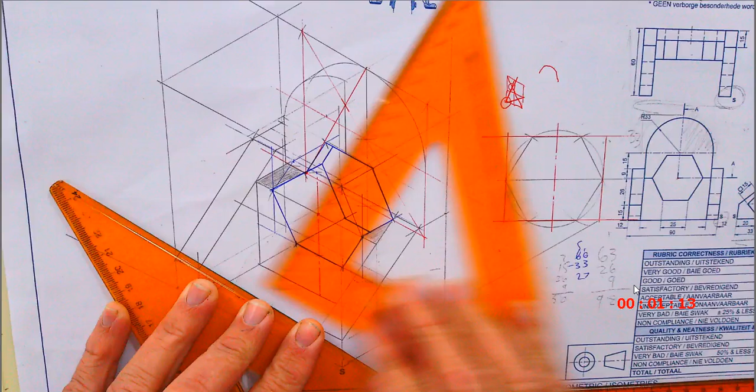My hexagon. So what happened is the hexagon is lying here in the front, right? And if you are drawing it out, we need to use these distances to project to.

So what I was doing is I drew it. You'll see here that distance is that distance, that width is that width. So you first draw it in the whole thing in the front.

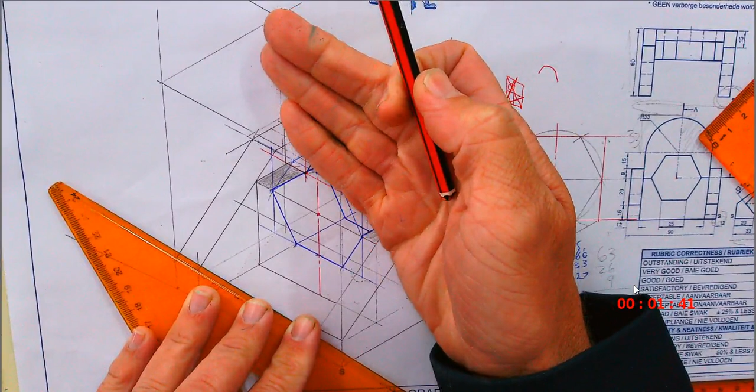Why is your top like pointy, so it's not flat? Why is mine like that?

So what has happened here is I haven't, this thing hasn't been completed yet, the side, so it might throw out your eyes slightly.

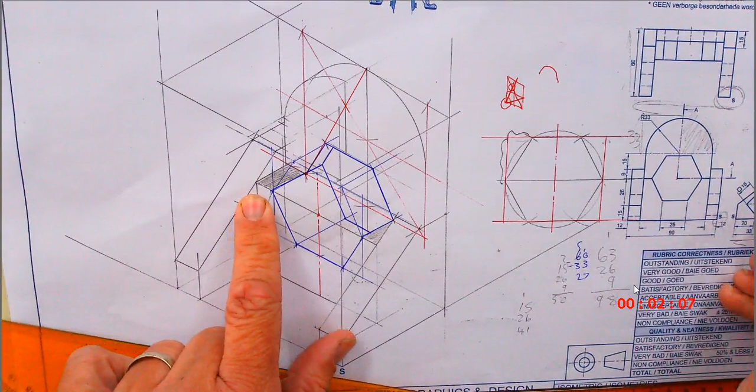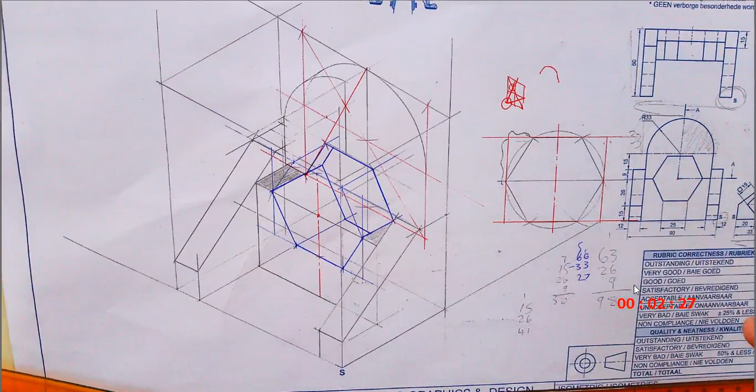Okay, so we're going to check that out now. What I did, the other part, it's an important part, and I didn't actually do it in this drawing. Normally I always say before you do anything else, sketch out the drawing. I cannot see that I did it on this specific page. I think I did it somewhere else, maybe, I cannot remember. I think I had a rough sketch somewhere. Bottom line is, if you've got a 3D sketch, you're going to save yourself a lot of drawing time.

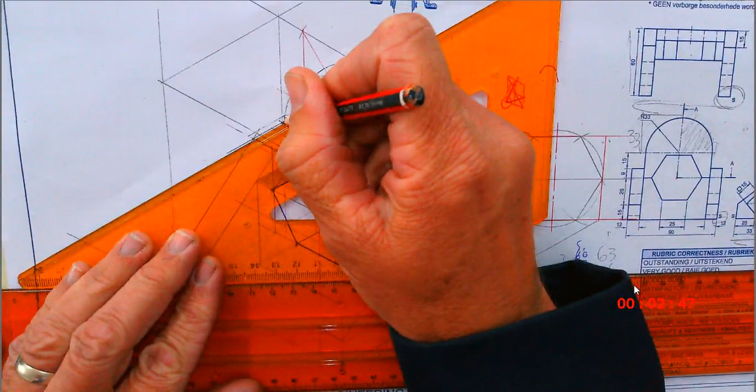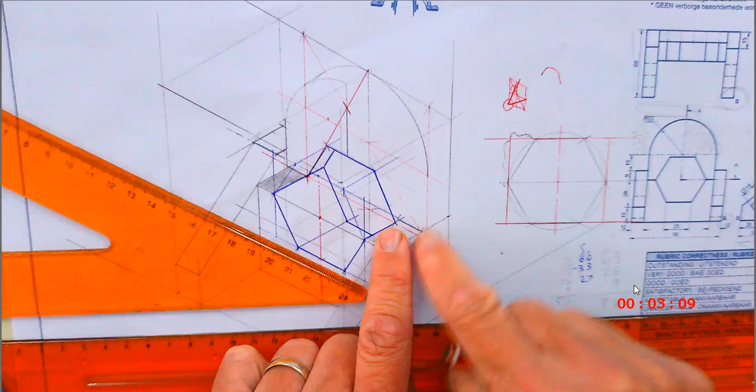You have to make sure that you are working on the correct level, because you can easily make a mistake and think that you are drawing on a surface when it's really a little bit further to the back.

Okay, I'm going to look at this part here. This is where my box and my drawing would end. I'm going to project that over. Some of this are going to fall away in a moment, but I'm first going to draw the whole thing.

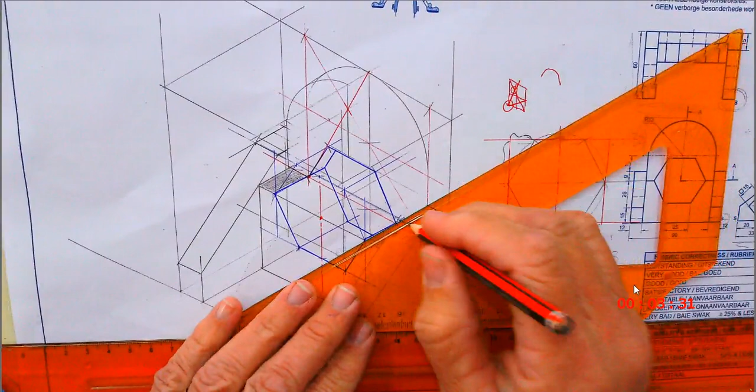I'm just going to take that point straight across here to get it on this side as well.

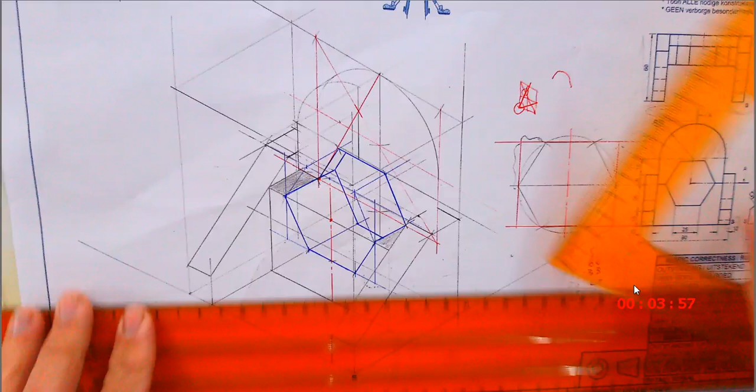This isn't such a difficult drawing, but it does take time. You have to practice these things just in terms of the time.

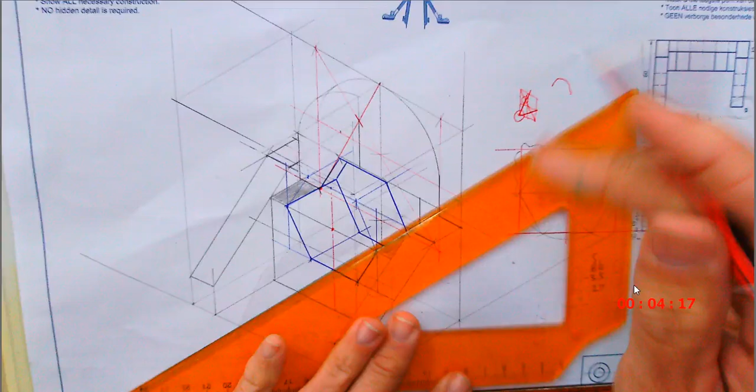Now I don't want to spend too much time on this part, because we are going to be cutting away some of this anyhow.

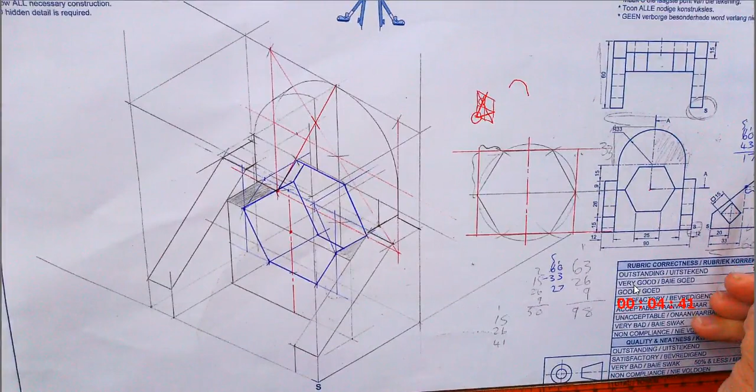So you remember I didn't draw in that arc there, but for myself I did put in the center part of the drawing there. Okay, what I'm going to do next, I just want to double check that I have everything here. This back part looks weird, but it is only 10 millimeters.

So let me check there. It is correct, so that's 10 millimeters there.

We have this part. I just omitted this part here in the front. Okay, and you can see there's many lines here.

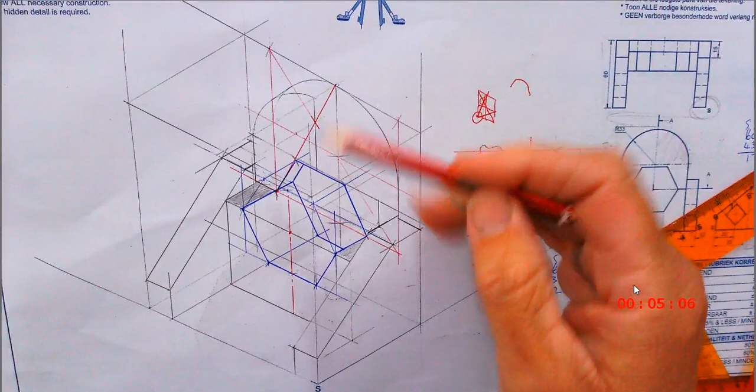So I'm going to take you back. Remember when we originally drew this box for the circles? Do it in another color just for yourself, so that you can see what's going on. We use that point for the arcs, and then we just moved it forward.

Okay, for this one, I think I just want to get that point again for myself.

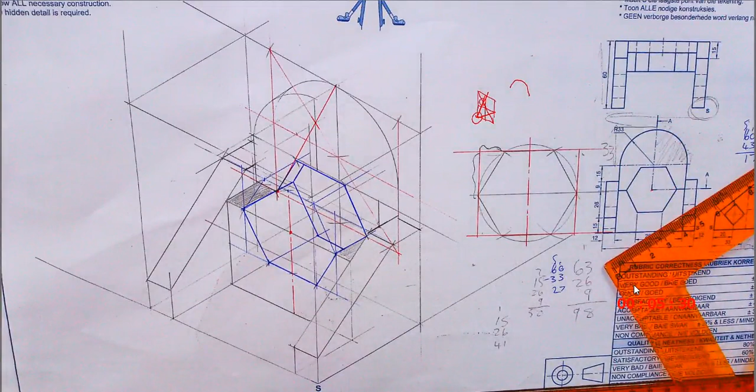So I'm just moving that point also 10 millimeters to the back.

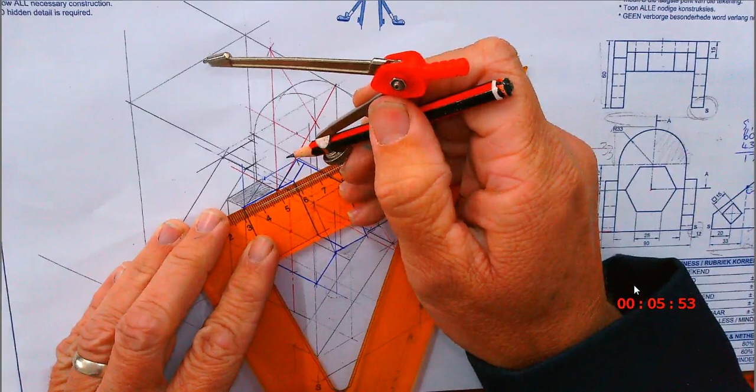Using the same radius, it should work exactly there. If it doesn't, I'm just going to put it in the middle, make my own little mark. It's 0.5 millimeter more than I have.

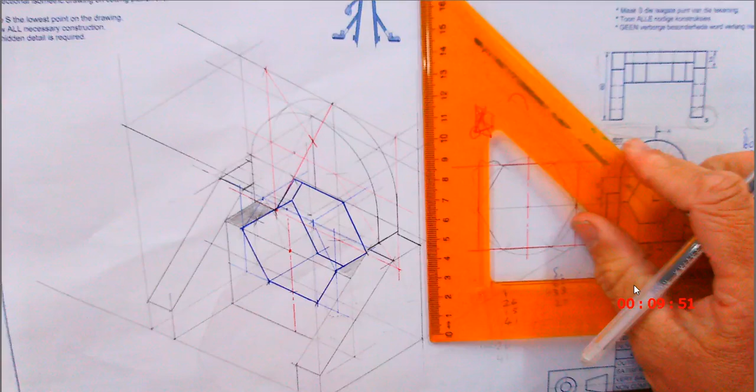So I'm going to work on a height of 41 mm over here.

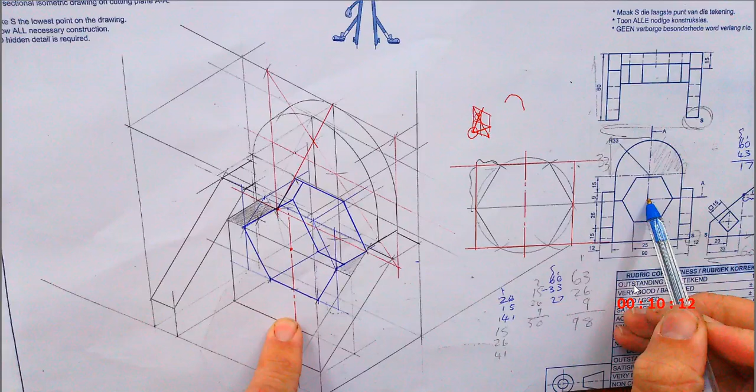Okay, and this is the easiest way to do it. If you look at that center point there where it cuts in, you're going to have to take this point and see if that is also 41, because it's supposed to be. But then it can get very complicated very easily, very quickly.

So this is also 41. I marked another 41 millimeters here on the side.

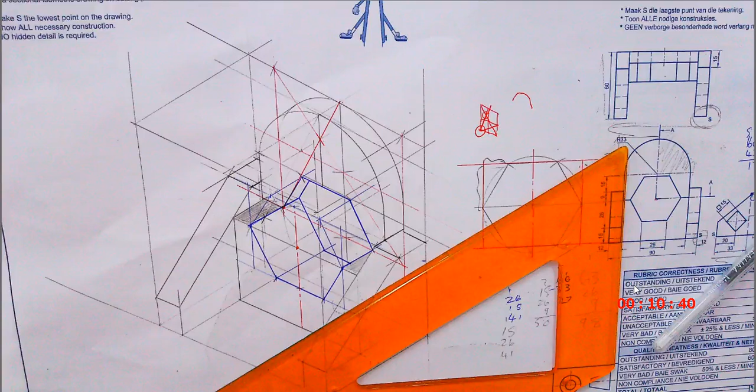I'm going to take it with on 30 degrees. I'm going to take it across.

Okay, now here's something you need to look at. I'm going to zoom in slightly. So now I don't have any hidden lines, but I'm going to have to go back and do this.

According to me, it makes a little edge there. That's what I get here. I'm not sure if this is correct.

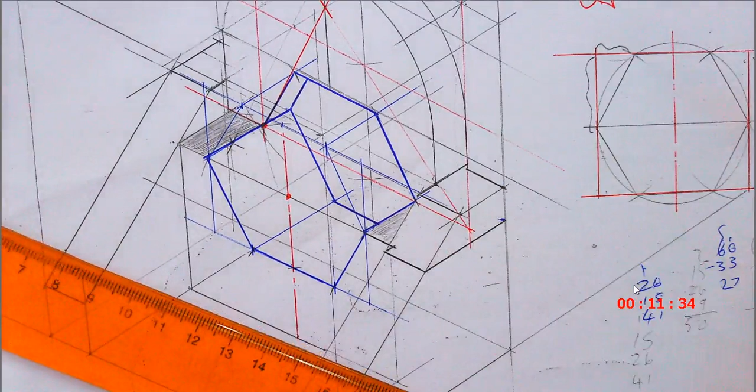If I look at that point there, that is lying exactly on that corner there, which feels to me like this is supposed to be one surface straight through. But according to my drawing, this is what I have now.

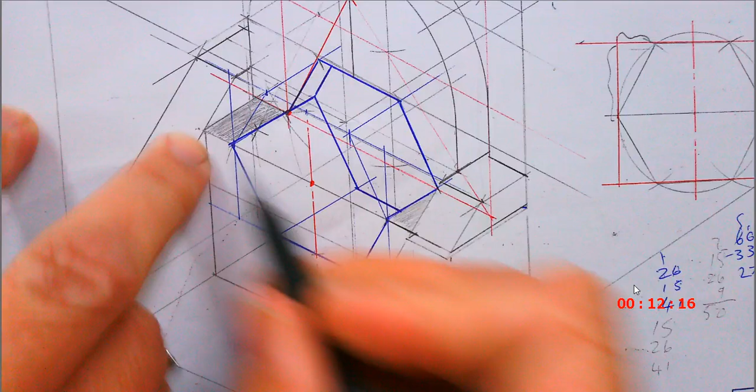Do you understand why I'm doing this? That point on that side sits on that corner, so it cannot be different in this drawing. It's supposed to be the same. So there's just a small inaccuracy issue there, which I'm going to fix quickly.

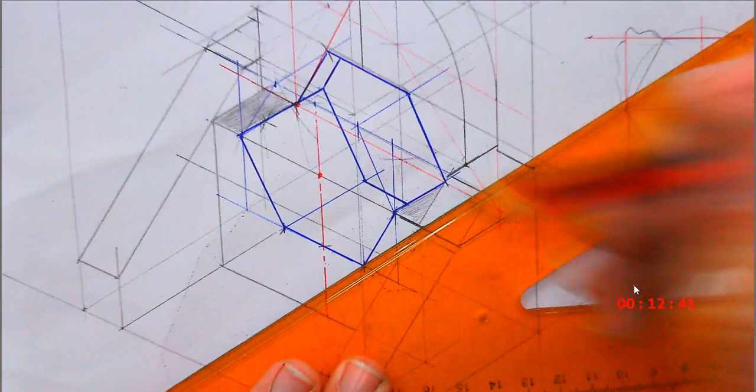Now we have to look a little bit further. I'm going to cut away this whole part here. It's going to go in and cut through this whole surface. I'm going to draw a line 30 degrees to the back here, and then it's going to cut up to that corner there. So I'm just going to work against this part here.

So it's going to cut in there. This is the original part that I'm going to draw in here to the back there. And this part must now be erased. I'm just going to erase it lightly, not faint, just lightly remove it.

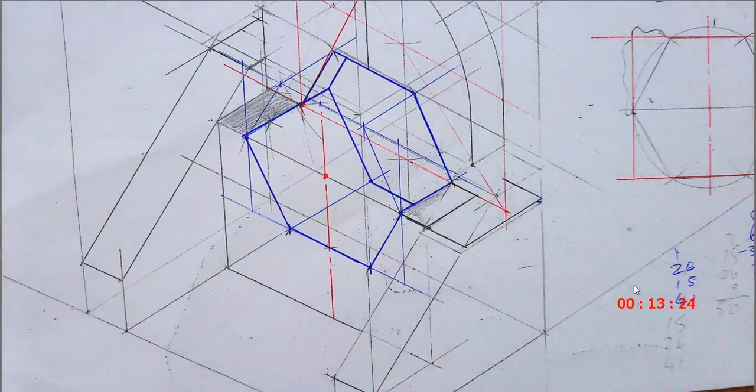Okay, right. Now I'm going to go from the other side. I'm going to start at the top, because the section line is cutting in. I'm going to zoom out a little bit. The cutting line is cutting in from the top there to the middle of that hexagon.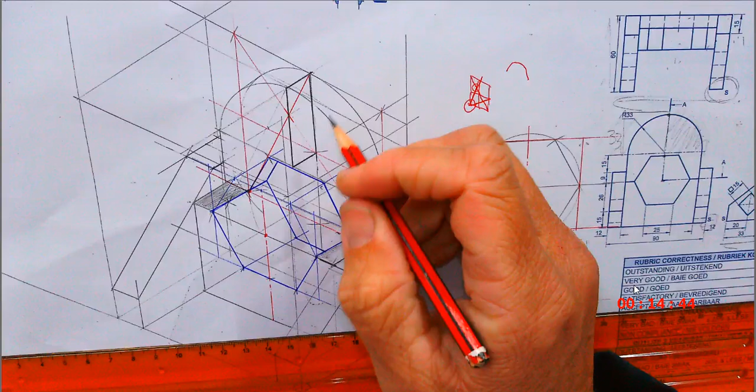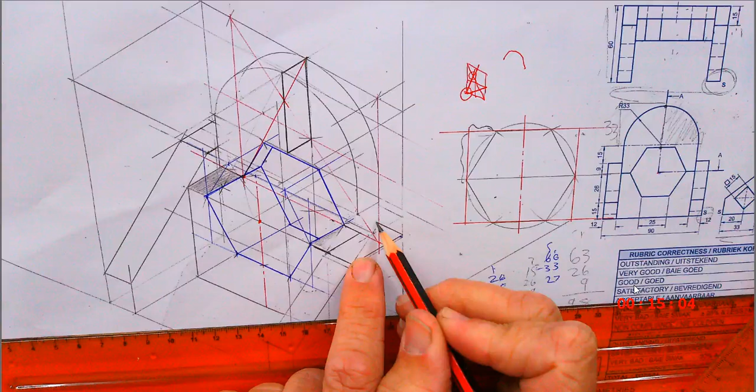Okay, now you must look further with me here. Remember we are cutting in like this. So I'm also cutting through until it meets up there at the back. Thank you so much, I appreciate it, Gabriella. So this must be taken away as well.

I'm opening up the drawing here so I can see that. So I'm basically only going to have this surface here and that surface there, but we have to look at something over here, and I'll talk to you about that in a moment. I'll give it back to you just now.

Thank you, Gabriella. So what I'm going to do at this stage is make the rest of the drawing a bit darker. There's one more thing we have to do. We still have to draw in the diamond shape. We haven't done that. Who wants to quickly tell me what we need to do there again?

You don't have to go over this in the exam, because you're not going to have time for that. As long as your lines are visible in the exam and we can see what you did, you'll get your marks.

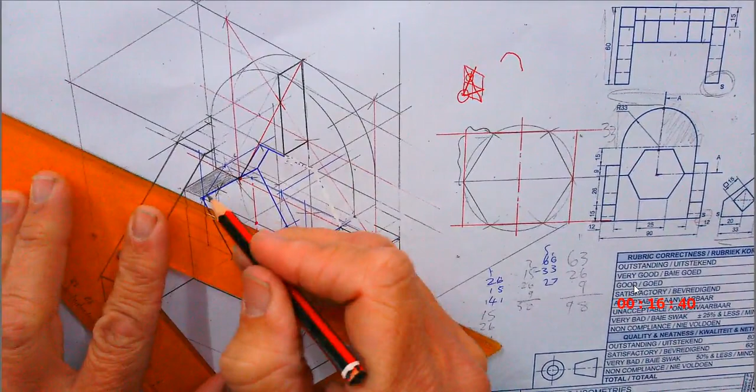I'm just going to darken that in. I only colored in this surface. I colored that in so that it's just a little bit more clear.

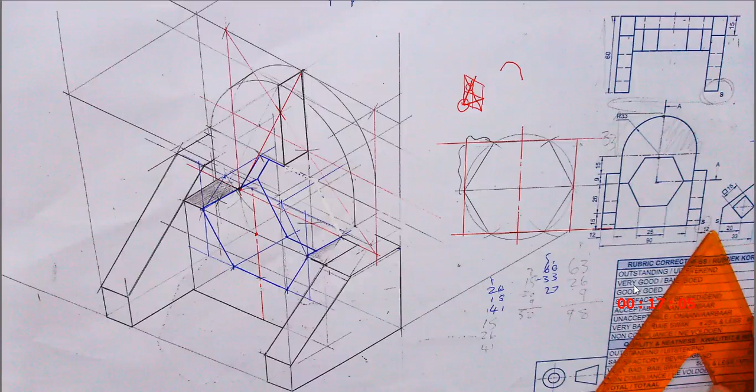One thing you shouldn't do, I've mentioned this before, please don't go over the circles freehand. If you do anything in freehand, at the end of the year they're not going to mark it. I've told you, it's so sad, in the matric final exam, children draw this thing perfectly, then they go over the whole drawing freehand, just to make it darker, especially the circles.

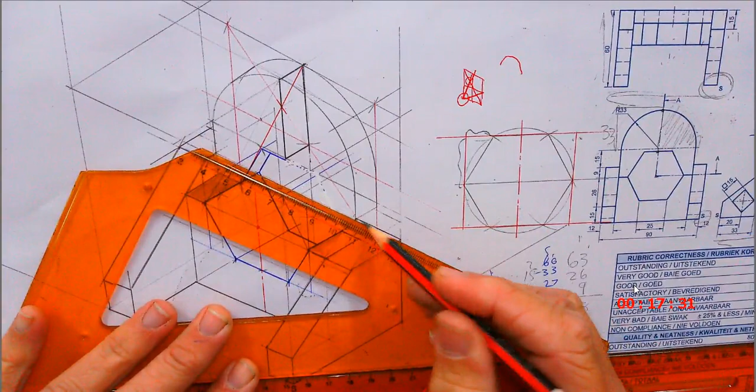We're not allowed to mark it in. You lose all the points. Because in the beginning of the paper they say, except when stated otherwise, everything must be drawn with instruments. So it's only in the first question where you are allowed to, in some other stuff, but I call it the little questions. That's the only place where you may do something freehand.

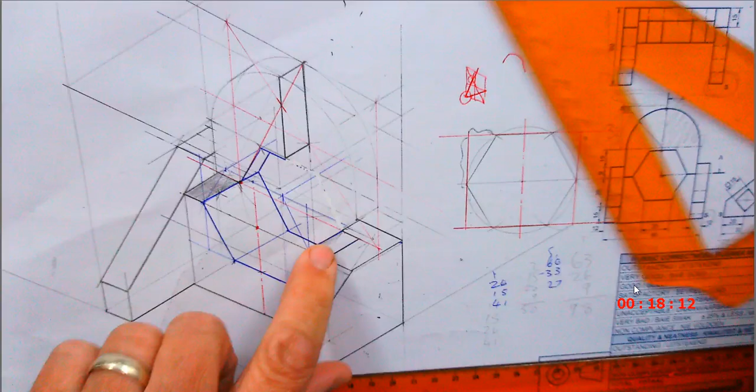And you have to tell me why if you say yes, and you have to tell me why if you say no.

Okay, let me help you now. What I'm going to do here is, this is the only place where you hatch at a different angle. So I'm going to take my finger, put it against this thing, take a Koki, and draw a mark, a line there for myself. I'm going to do the same thing on this side, because I don't want to have it permanently on my drawing, I just do it like that.

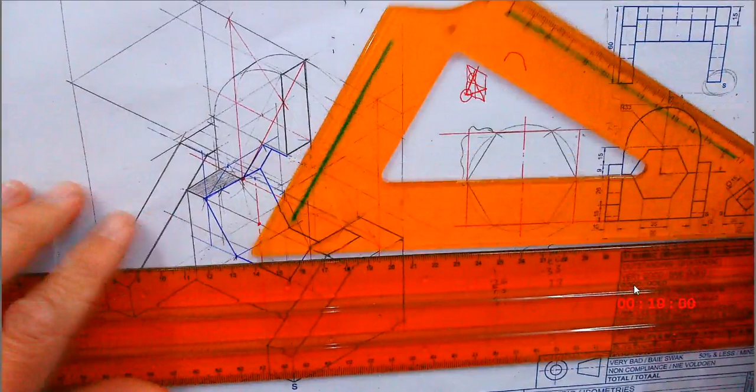And now I turn around, this is the only place where you're going to work at 60 degrees. Hatching is going to be done on the isometric in 60. So I'm just going to draw that line. I'm going to move it up.

Okay, maybe this hatching is a little bit too far apart. So I should have a line that is a little bit smaller. This is not necessarily going to be equally spaced, but I'm going to try.

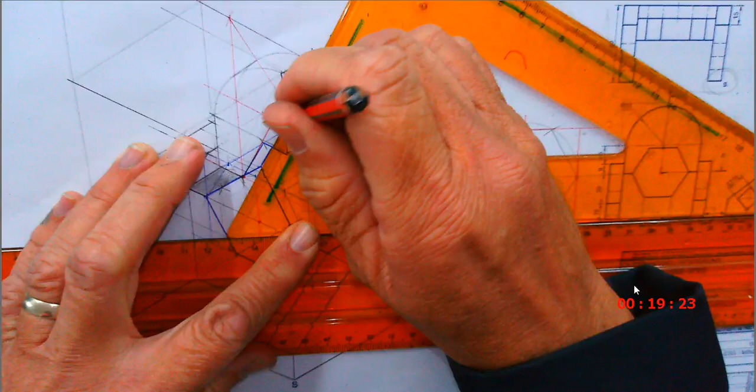My little line should have been a bit smaller there. Okay, right, so there's the hatching on that surface.

This came in at one angle, so when I'm going to cut out at that angle, I'm going to have to work at a different angle. So I'm going to make this smaller, I'm going to draw a line here.

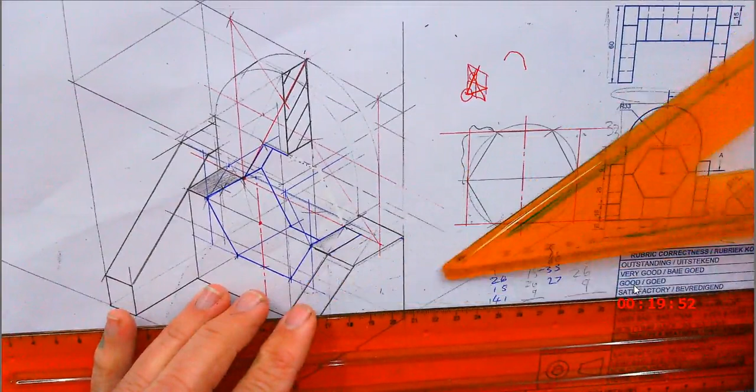This side I'm going to work on, also on 60. So it should be a little bit smaller. I'm going to make a little line there.

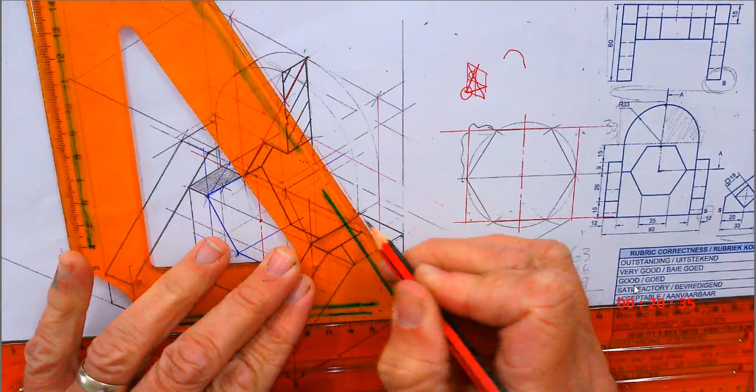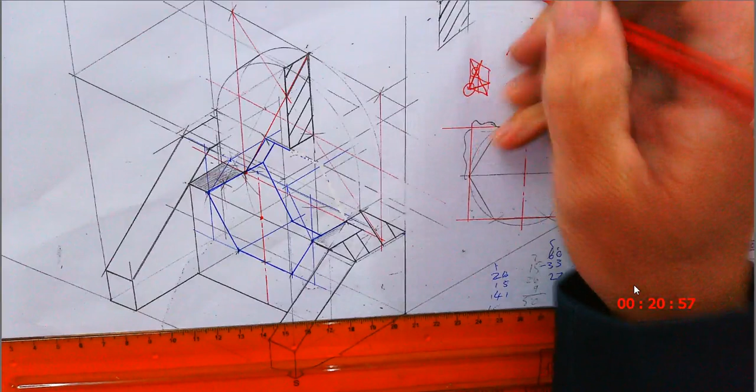Okay, if this doesn't work nicely for you, what you can do is on any level in isometric, you can measure the same distance down and the same on that surface, and that will give you an angle, which you can then copy. If it was like this, you can also go measure the same angle to this side, to that side, get the angle and just take it across. Here we could of course also draw horizontal lines. That is also possible to get what we are looking for.

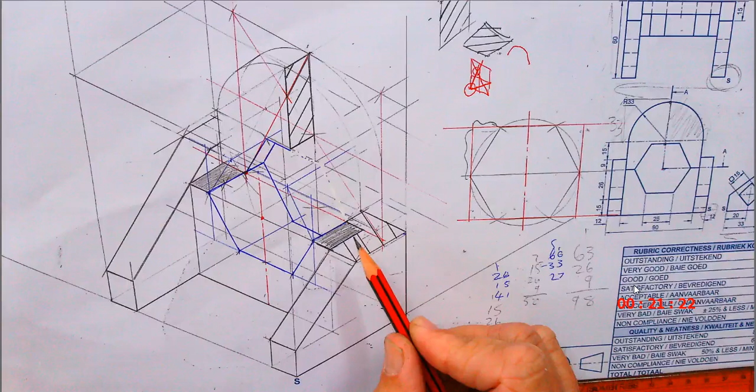Okay, my question was, am I going to hatch this, yes or no? No, sir. No, why not? Sir, I have no particular reason, sir.

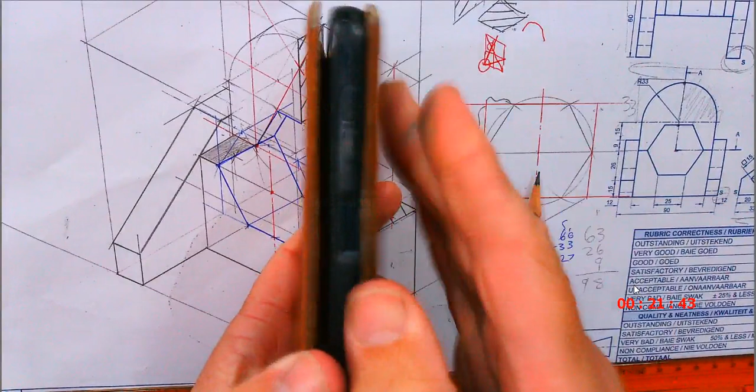Okay, it's very simple. When you're going to cut through that surface, that's already, there's nothing there. So, to give you an example, if I had a sandwich here, here's my bread, and there's the gap between the two slices of bread. So if I now take a knife and cut through there, the knife will go through, but I'm not actually cutting anything. You understand what I'm saying?

Thank you for your honesty.

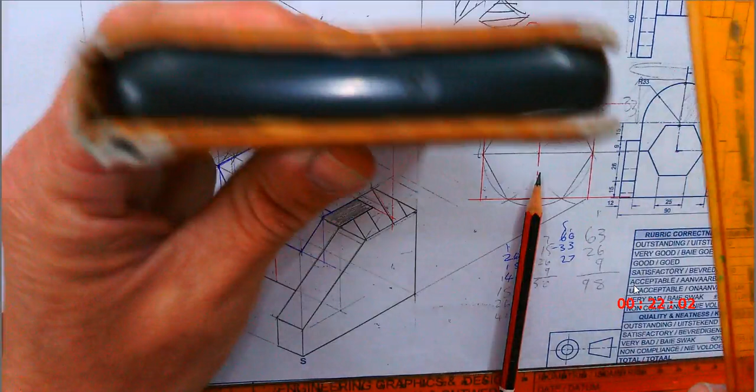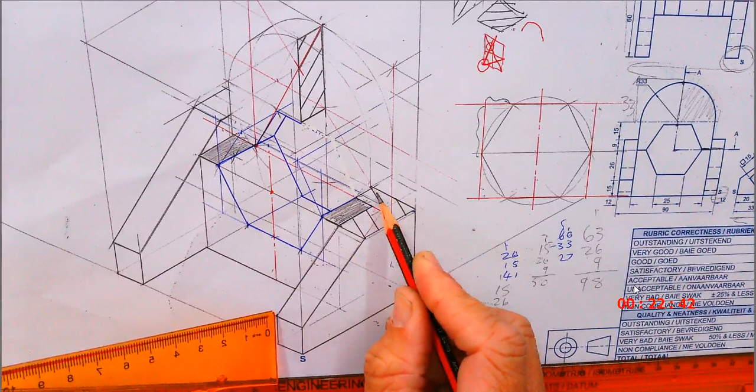Okay, so if you look at a sandwich, and I say I want to cut the sandwich. If I cut it like this, I'm going to cut through it, right? If I cut through the middle of the phone there, I will cut it. But the moment I cut where there's nothing in between here, there, I'm not cutting it. So what happened here is the section line was going through a given surface there, but it's not really cutting it, it's just going through it. But over there, I am cutting through that surface and also at the back. In this area, that is the reason why I'm not going to cut that part there.